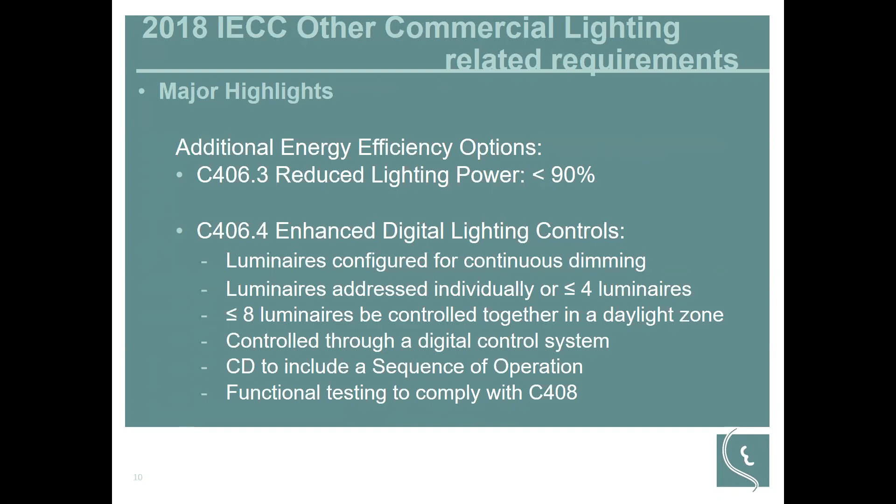So there are two lighting related additional efficiency packages that you can choose from. One is reduced lighting power: if you have less than 90% of what the building area method or space by space method allows, then you are meeting this additional efficiency package option. Or you could choose enhanced digital lighting control, which has requirements that are a little bit complicated, but achievable. So if you pick this as your additional energy efficiency option under the prescriptive path, here are the requirements that you need to meet.

And another highlight that we want to mention is the functional testing of lighting controls. Not only do you need lighting controls that have the ability to control the lighting fixtures, there is also language requiring you to make sure those are actually working properly.

So prior to the inspection, you need to make sure that fixtures and controls and all the hardware related to that properly function. So you need to do the testing.

And the second thing that we want to highlight is that there are requirements for documentation. Construction documents should include drawings that indicate the location and catalog number of each lighting control equipment. And manuals and reports should be provided to the owner within 90 days of the receipt of the certificate of occupancy.

And those manuals should include the names and addresses of a service agency for the controls, a narrative of how each system is intended to be operated, submittal data, the O&M manual, and a schedule for inspecting and recalibrating all the controls. So that information should be included in the manual.

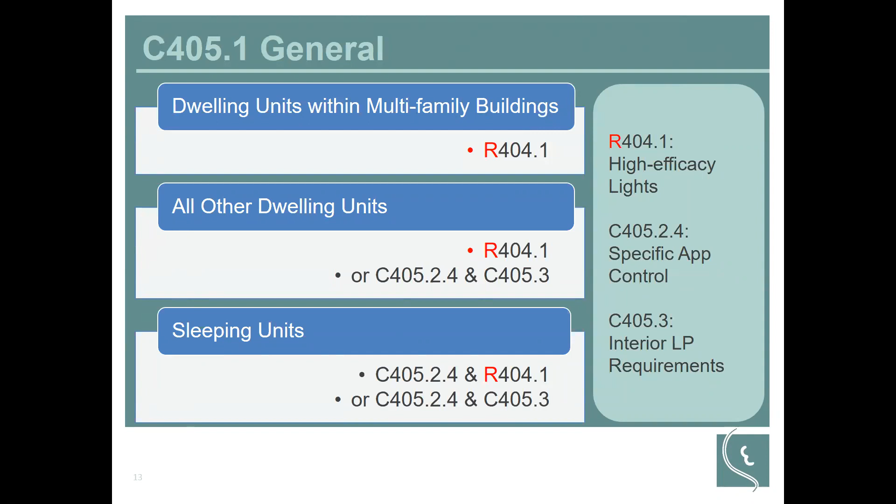Because we just mentioned that you could use the R section for some of the dwelling units, we will briefly mention the residential section of the lighting requirements. R404.1 is a mandatory section in the residential provisions. It says not less than 90% of permanent lighting should contain only high efficacy lamps. In 2015, it was 75%. Now it has increased to 90%.

And it says high efficacy lamp. According to the 2018 IECC, the definition of high efficacy lamps is as shown. It has different categories: if the lamps are more than 40 watts, this is the high efficacy standard. If the lamps are less than 15 watts, this is the high efficacy lamp standard.

But Illinois has its own amendments, and this section is amended. Well, it's not confirmed because the new code is not effective yet, but it will be changed to fixtures. So for high efficacy lighting, the fixture should be more than 55 lumens per watt, and the lamps should be more than 65 lumens per watt. That's the definition based on the Illinois amendments, which is different from the IECC's definition of high efficacy lamps. So you should be aware of this if your project is in Illinois.

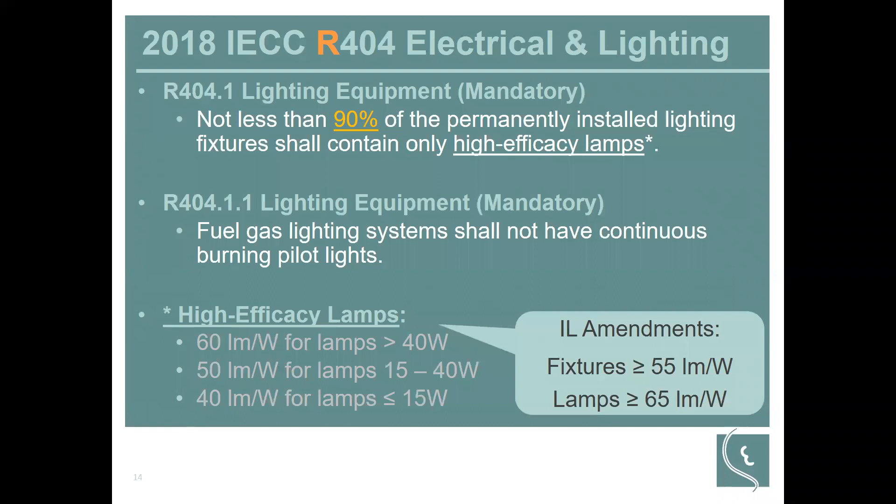So about lighting control. You can choose to comply with the traditional lighting control requirements, or now you can use LLLC, luminaire level lighting control. Luminaire level lighting control has three sections it needs to meet: occupancy control, specific application control, and manual control.

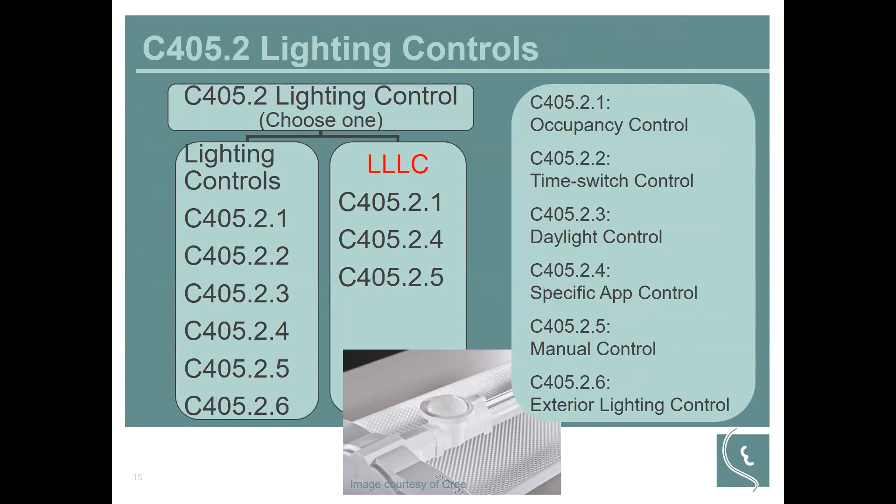On top of that, LLLC should be independently capable of these requirements. The first one is dimming control. The second one is daylighting control. And third, the luminaire level lighting control should be able to be configured and reconfigured for performance parameters, including the dimming set point, timeout, and wireless zoning capabilities.

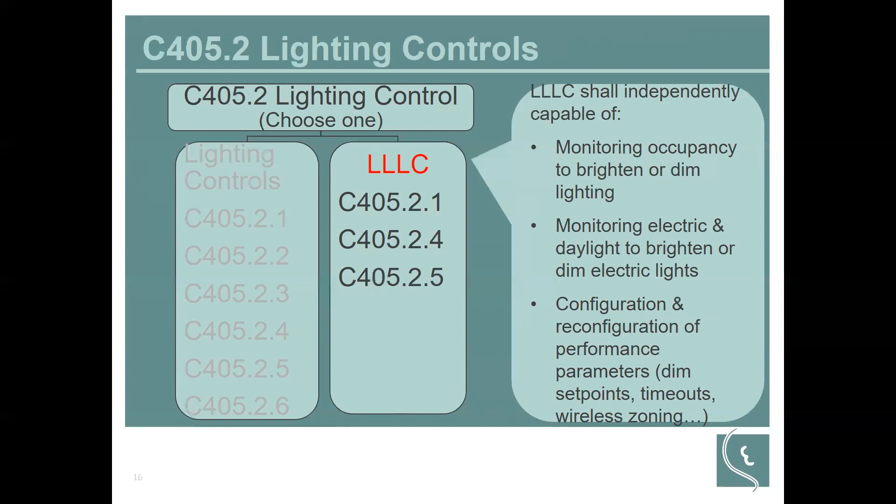And then occupant sensor control. The new thing in the 2018 IECC in terms of occupant sensor control is that open plan office areas are included in the occupant sensor control required areas. Other areas were already there in the 2015 IECC, with slight changes, like warehouse. In 2015, it said just warehouse. Now it says warehouse storage areas.

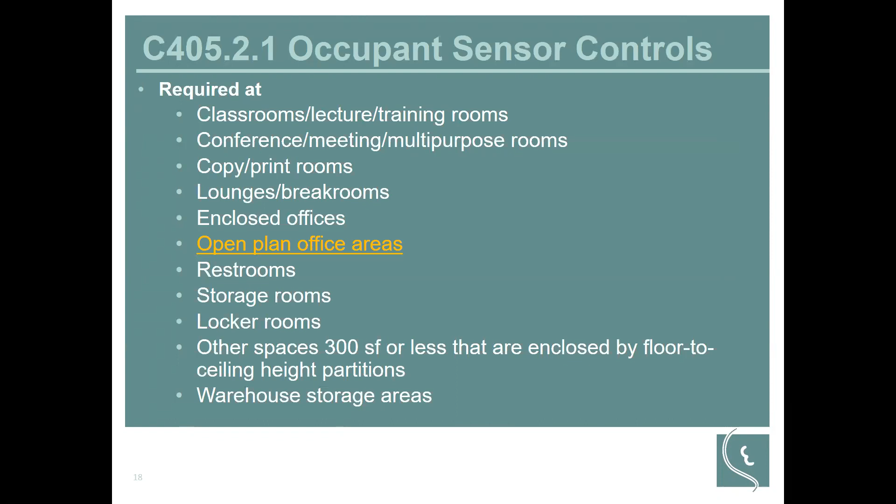And under the occupant sensor control, there are some requirements for what kind of function that occupant sensor control should have for different types of area. And one is warehouse.

So the requirements for the occupant sensor control in warehouse: it should reduce lighting power by at least 50% when there's no occupants there. So 50 or more. And then the control should cover the aisleways and open areas, but then it should be separately controlled. And then each aisle also needs to be independently controlled by the occupancy sensor.

So the picture here on the right shows that only one aisle is on. So it is separately controlled from other aisles or the general area.

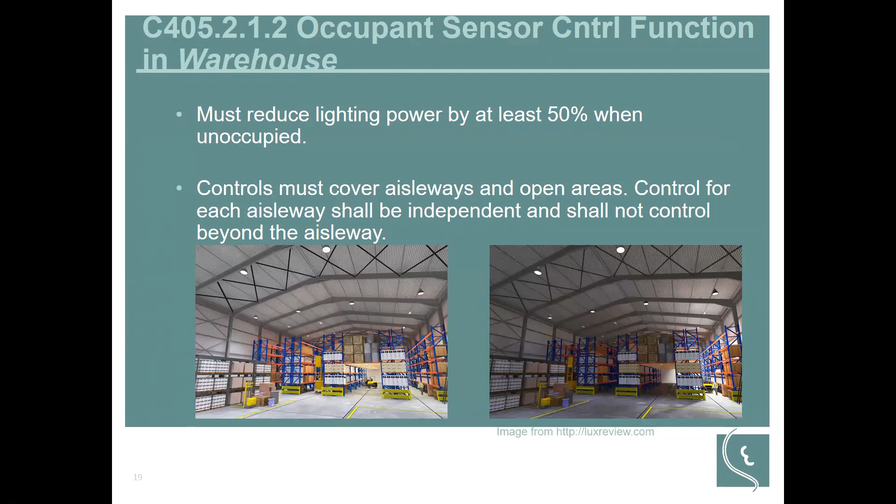And then the second area that has some detailed requirement for the occupant sensor control is open plan offices. So open plan offices that are larger than 300 square foot should have occupant sensor control. And you need to make sure that the control zone cannot be larger than 600 square foot.

So it will not make sense if you have a huge open plan office and have one occupant sensor control to control all the lights in there. So that's why it has the limitation on the control zone as 600 square foot.

And then the occupant sensor control in open plan offices should turn off general lights in all zones within 20 minutes, not 30 minutes. It was 30 in 2015. So it should be turned off within 20 minutes after occupants leave.

And then the control should reduce lighting power at least 80% within 20 minutes after no occupancy, meaning it could turn off, but you could have it dim down to 20%, reduced by 80%. And then daylight control should be activated only when occupants are present. So if there's nobody, the daylight control should not trigger the light to turn on.

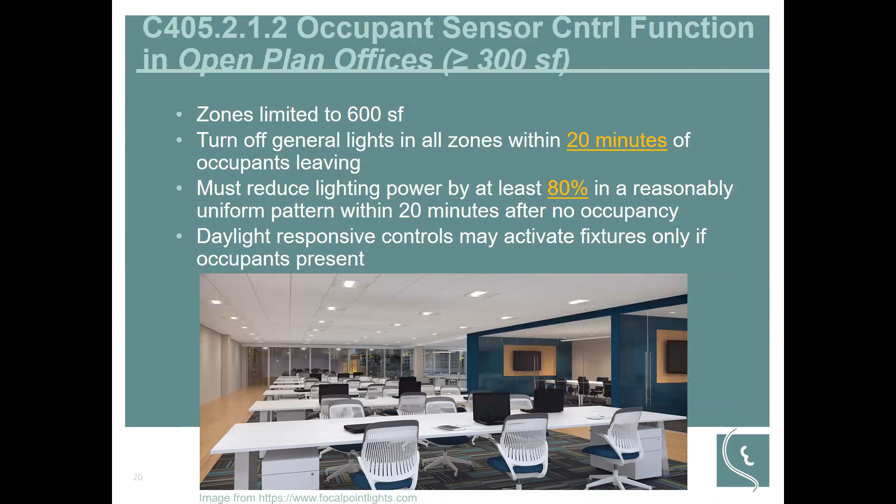And what about other areas other than warehouse and open plan offices? Those areas that are required to have occupant sensor control should have auto off within 20 minutes after occupants leave, and then it should have manual on, or it could be auto on if not more than 50% of power is being used. And there are some exceptions to this requirement, as you can see, mainly for safety reasons.

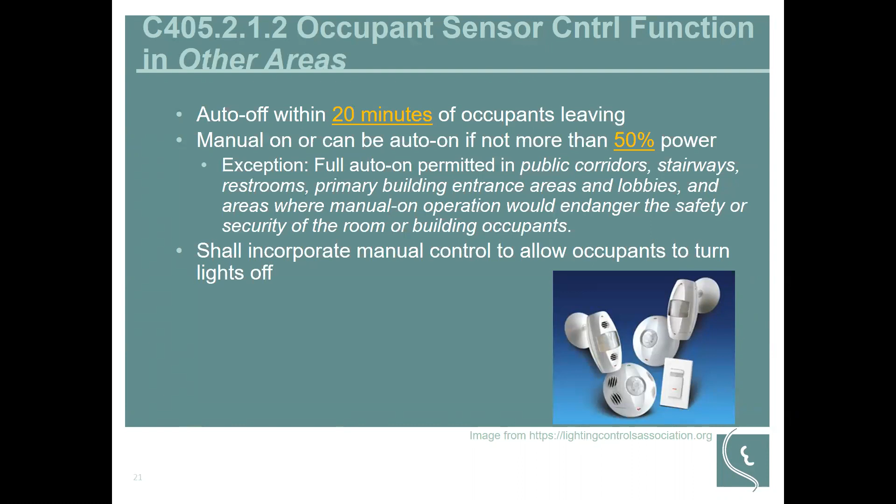And then another requirement for the occupant sensor control in other areas: it should incorporate a manual control. So if there's an occupant that needs to, for some reason, they should be able to turn off the automatically turned on lighting. So those are the requirements for the occupant sensor control in all other areas but warehouse and open space offices.

And then time switch controls. So time switch controls are required in all the areas that do not have occupancy sensor controls. So it either has occupancy sensor control or time switch controls. And the exceptions to this time switch control requirement, as you can see, are mainly for safety or patient care areas.

And then time switch control should have these functions. Each space should be provided with manual control for light reduction in accordance with this section. So it has a requirement for the manual control for light reduction, C405.2.2.2. So each space that has time control should have manual control for light reduction.

And time switch control should comply with these requirements, which are basically to have a 7-day daily schedule, a holiday shut-off function, and at least 10 hours of program backup if power is discontinued or disrupted.

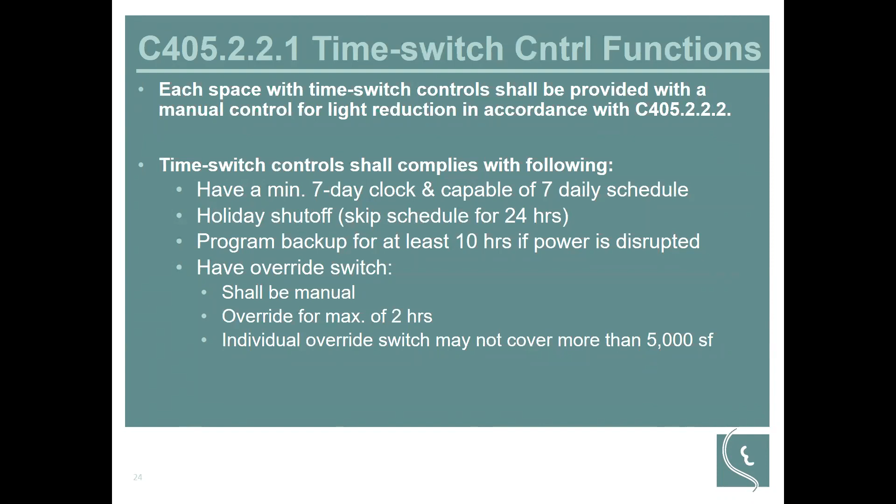So the light reduction control that we just talked about, the time switch control should have this too. So manual control should allow occupants to reduce lighting by at least 50% or more, reasonably and in a uniform pattern. So you can see the picture on the bottom. So you could reduce the light by dimming, so all the fixtures are equally dimmed to meet a certain level.

And then the second picture shows alternating luminaires. You could have every other fixture off, or the other half on. So it's kind of spotty on the ceiling, but it may work for certain applications. And then the last one is alternating lamp. If the fixture has multiple lamps, you can alternate.

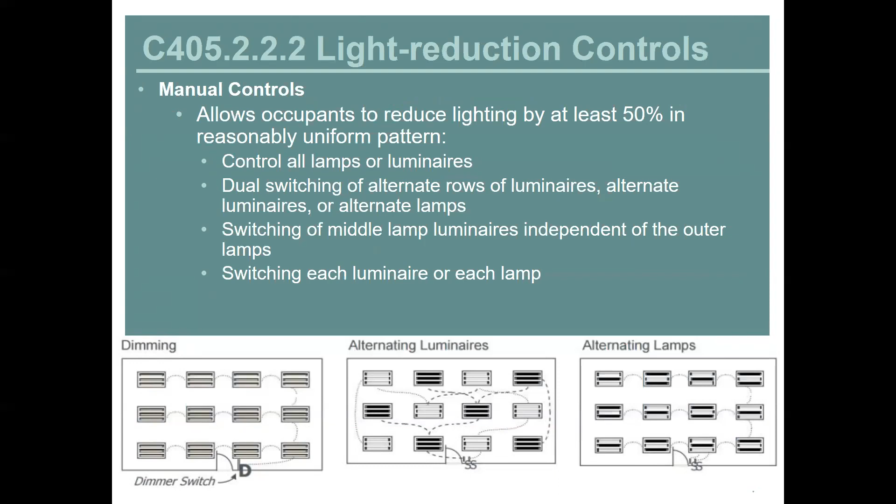So any of the ways, if you could reduce the total light by at least 50%, then you could meet this requirement of manual control. So now we're going to talk about daylight responsive control, and Ryan is going to take over from here.

Well, thank you, Sumi. So daylighting controls, these are required in spaces that do have either sidelit zones through windows or other fenestration, or toplit zones, which may include things such as skylights or clerestories. And so they do require this for spaces that have more than 150 watts of lighting power in these zones.

There are some exceptions here. One of these can be very useful for many projects. Obviously not a whole lot of facilities are healthcare facilities or specific application controls. The last exception is potentially a very useful one that we'll talk about a little bit later, as far as using reduced lighting power to no longer require daylight harvesting controls.

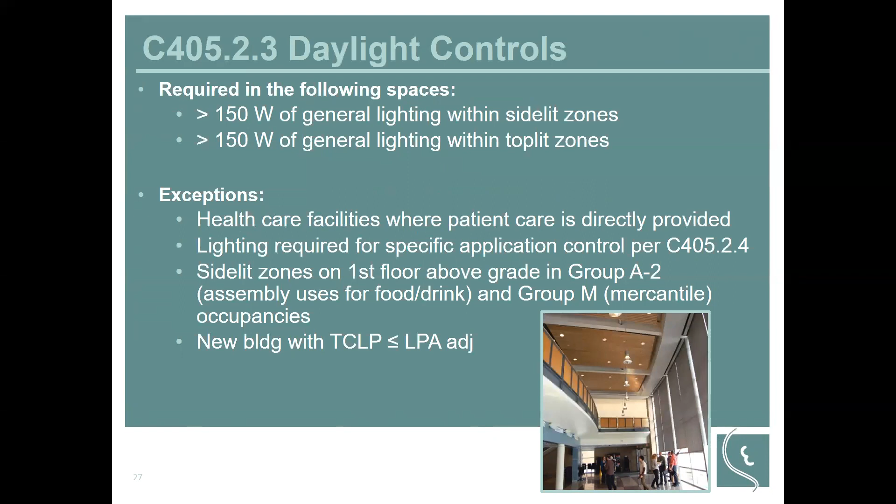As far as calculations, we won't go too deep into this, but you have to know what counts as a watt for your calculations as far as how much lighting power you have. It's the sum total of the luminaires, the ballasts, LED drivers, track lighting, as well as any other things that are not covered in the other sections.

Now, as mentioned about the lighting power for daylight harvesting, if you reduce your lighting power by at least 40% of the weighted area that is in the daylit zone, you don't have to have additional daylight harvesting controls, because by installing less power density, you are getting the savings through better lighting design rather than adding additional controls.

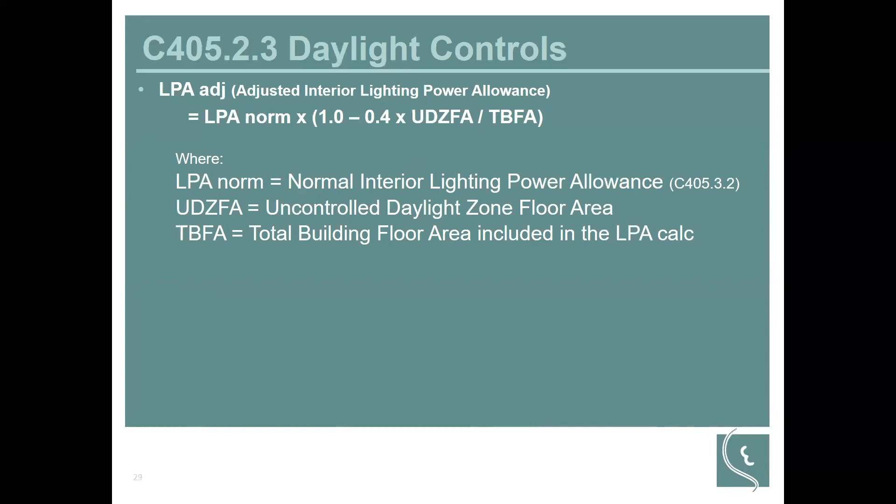So as far as what this might look like in our first example on the left, you can see that 50% of our total square footage is in the daylit zones. So 100,000 divided by 200,000 gives us our 50%. And so being 40% of the weighted area of the 50%, that means if I reduce my lighting power by 20% or more of the budget, then I don't have to do daylight harvesting controls.

In the second example, here we have a smaller daylit zone where it's only 50,000 square feet of a 200,000 square foot building. So it's a quarter of the space. So if I take 40% less and I need a quarter of that, if I can reduce my lighting power by 10% across the whole building, I now take advantage of that exception. This is one very beneficial thing, because if you make use of this, that's daylight harvesting controls that you don't have to buy, you don't have to install, and you don't have to commission.

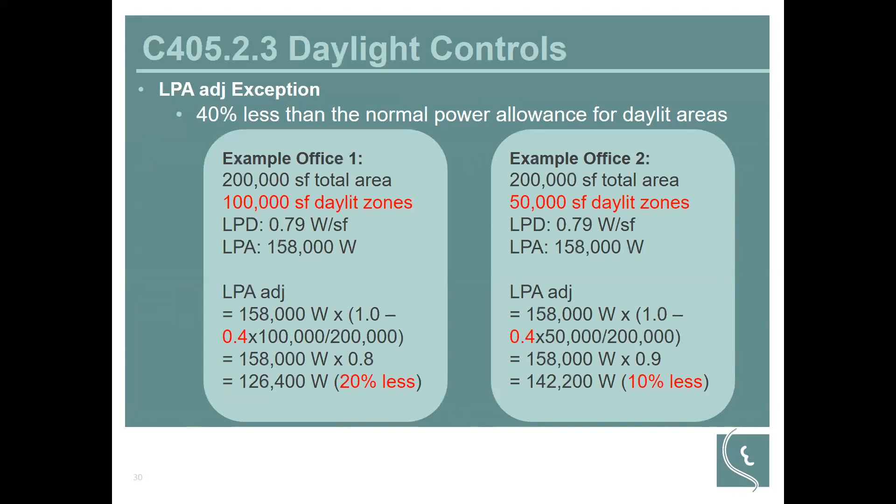Daylight harvesting does have to be able to completely turn off lights in the event there is adequate daylight. Many people have likely experienced being in a very bright room, and you still have the lights on, even though they're not very contributive to the overall lighting environment.

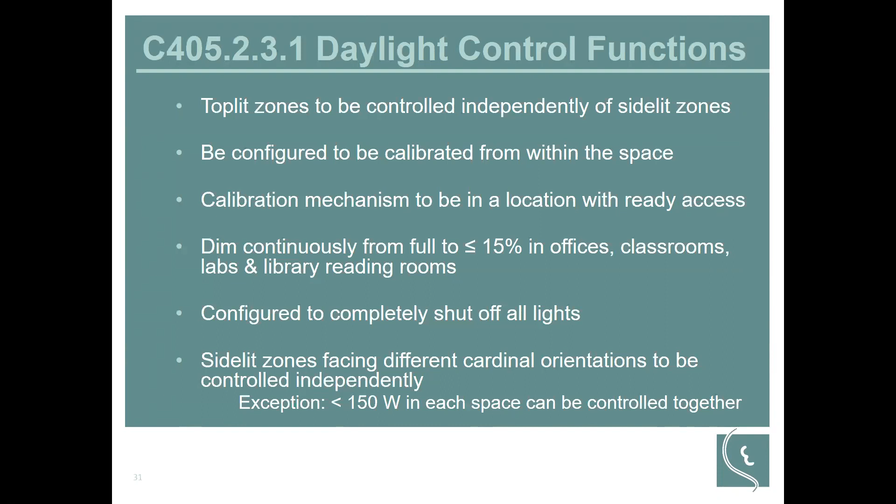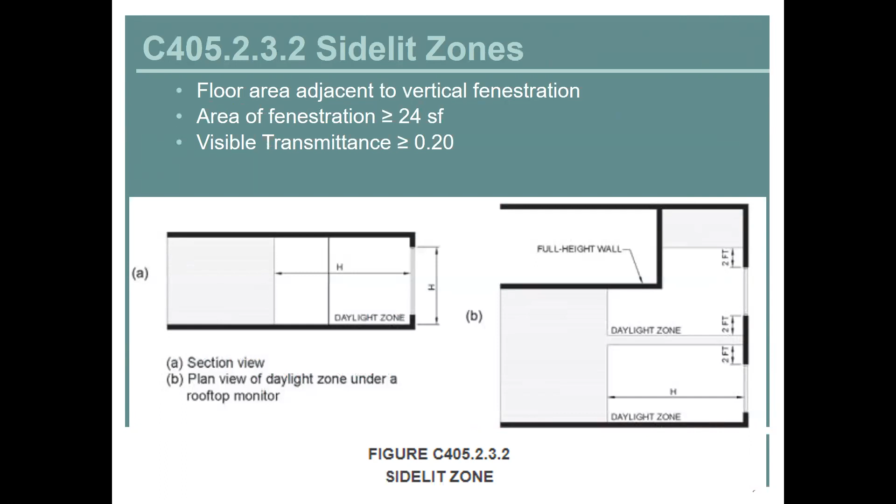One thing that the code does very well is they provided some very nice depictions as far as how to calculate the zone areas, noting that for sidelit zones, you have to have windows that are large enough to qualify as sidelit areas. Windows that are less than 24 square feet or have extreme tinting on them would not qualify as a sidelit area. And these depictions are also in the online version of the code. So again, we would refer you back to that for further clarification and assistance with trying to draw out where those areas are.

This is what it might look like on a set of blueprints. This is at a school. Now here you can see that the shaded areas are my sidelit zones. I don't have any skylights in this building, so I don't have any toplit zones. But it is not uncommon for designers to have a set of sheets that indicate the sidelit zones on a lighting print and a separate print without the shading for clarity of viewing.

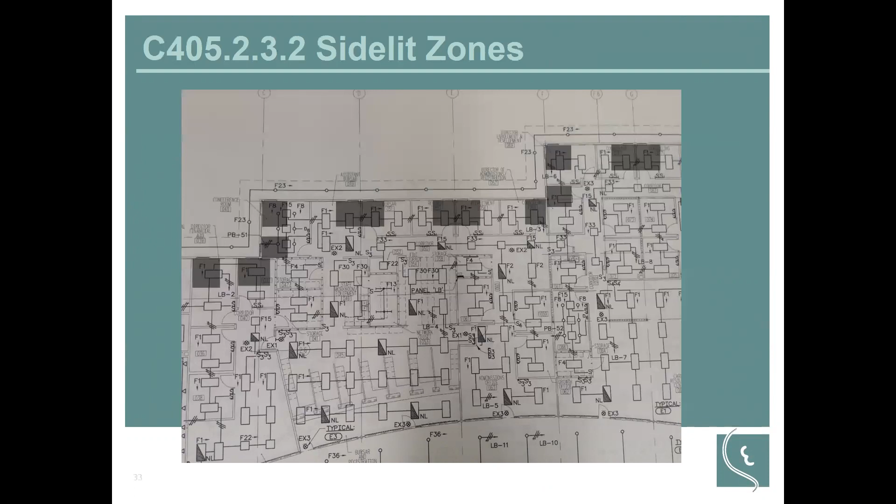And this is something that is required, that you identify the side-lit and top-lit zones on the drawings. As far as top-lit zones, and again, the code goes into a couple of different methodologies. Here showing a skylight. They do have other ones for roof monitors and other top-lit type of zones. And here they do provide some provisions for if you have buildings that have blocked direct sunlight during these peak times, that you don't have to have the top-lit zone controls, purely because it wouldn't be of any benefit since the buildings may be in the shade through a substantial portion of the year.

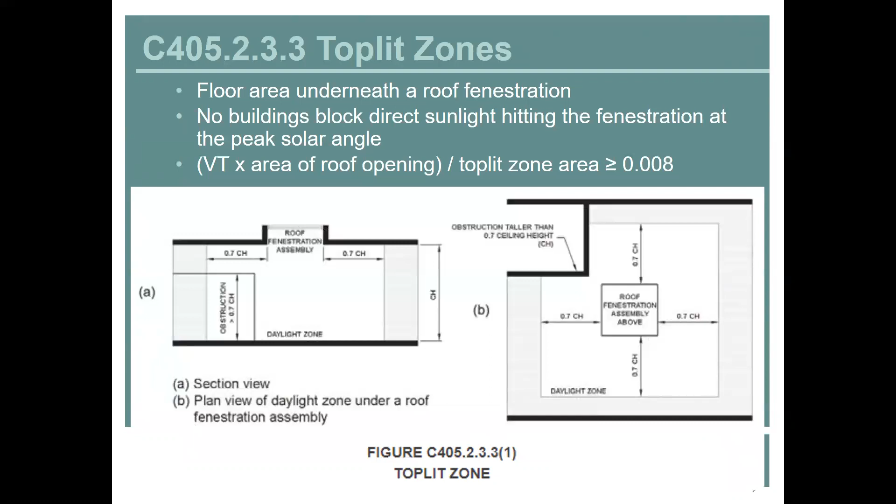As Sumi had talked earlier, there are some specific application controls that are required for lighting controls. One of these is for display and accent lighting, obviously in your display cases, supplemental task lighting, so your desk lights, and lighting equipment for sales or demonstration. So they do have provisions to not require controls for occupant sensor or time switch, but they may also require specific manual controls separate from the general area lighting.

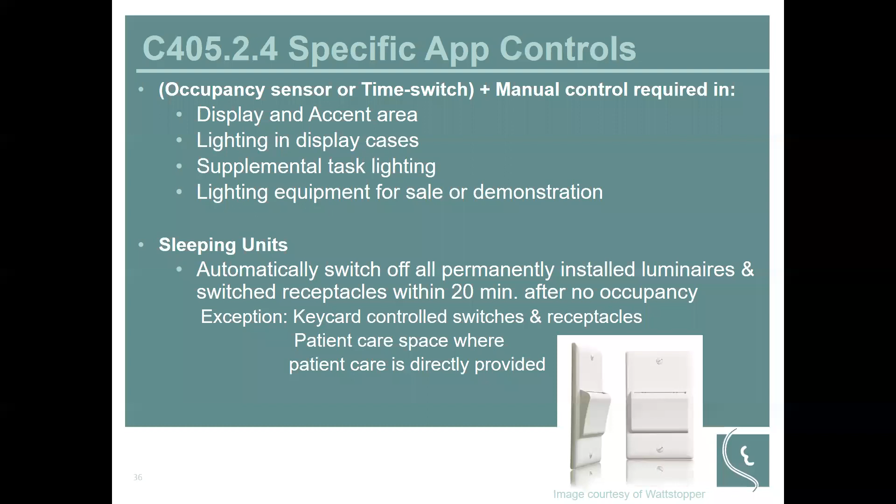Sleeping units, we're now seeing these in more and more locations, hotels and motels using key card for sleeping units in lieu of occupant sensing controls that are required to turn it off 20 minutes after there is no longer an occupant sensed in the space. Beyond the keycard controlled switches and receptacles, they also do have an exception, again, where patient care is directly provided. For dwelling units, they do have specific requirements for occupant sensor controls. Again, these are dwelling units inside of commercial buildings.

And also there are provisions for non-visual applications. Here depicted plants and food warming. So this would use time switch controls that are independent of the general lighting. You know, one might imagine a restaurant, if these heating lamps were controlled by the general lighting circuits, then these warming lamps would be on from before the restaurant's open till after it's closed, even though there's not likely to be any food present during these times.

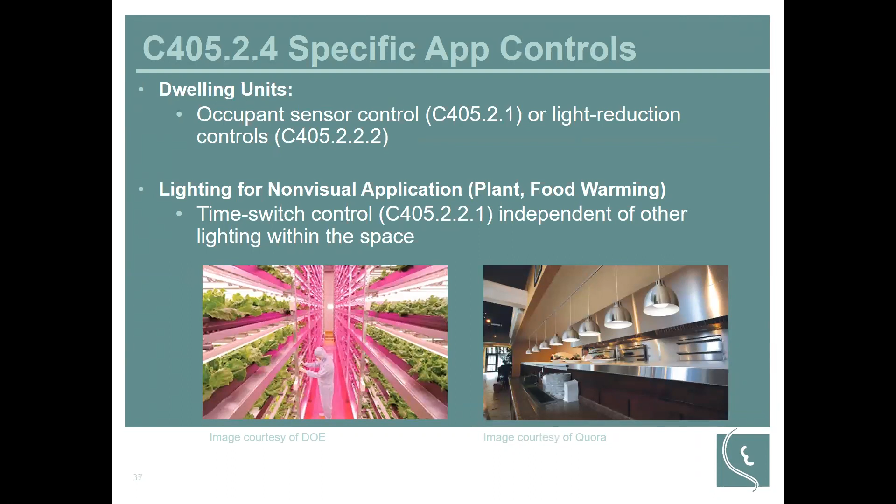As far as exterior lighting controls, there have been substantial changes in this area as far as decorative lighting, which includes facade and landscape lighting, to require not only daylight shutoff, but also time switch function. Previously, a lot of the exterior lighting controls required either daylight shutoff or time switch function. New codes are now requiring it to have both functions. Decorative lighting also has requirements for shutoff during non-business hours, and exterior lighting is required to have lighting setback of at least 30% during these non-business hours. And it does provide some guidance as far as a couple of different options for determining what that time frame is.

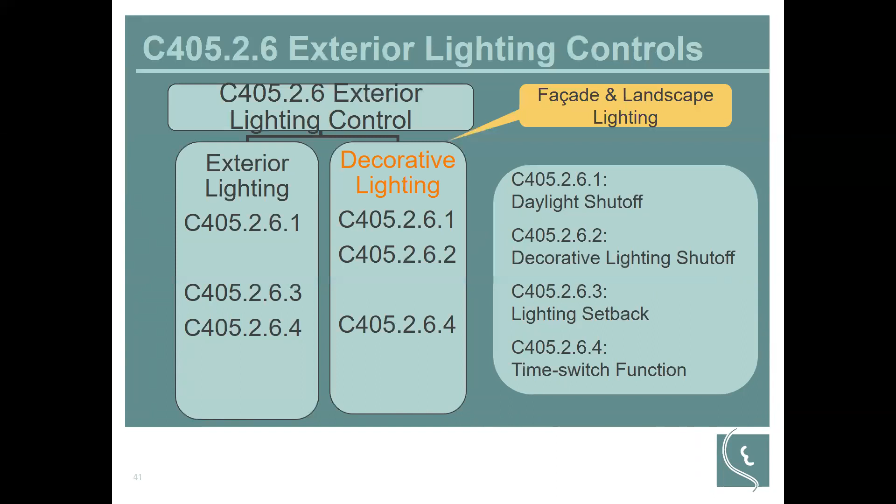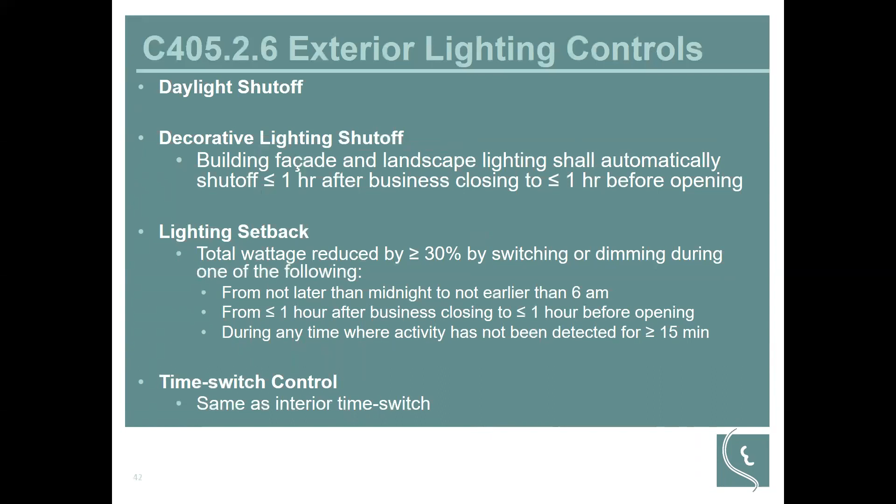Noting the daylight shutoff, this is the one that's the most common. Decorative lighting shutoff, here noting that's within 1 hour of business. And the lighting setback, here's the three options. It can either be turned off from midnight to not earlier than 6 a.m., or within 1 hour of business, or you can use an occupant sensor and turn the lights off when there is no activity for greater than 15 minutes. So, time switch control provisions here are the same as interiors, which includes 7 different daily schedules, holiday setbacks, and program backup capability of at least 10 hours.

As we move over to interior lighting, you can choose either the building area method or space by space method. This does have some additional allowances for special use lighting, particularly sales areas. And this fits very nicely with the National Electrical Code, which allows for a reduced load calculation if you do provide some power monitoring of these lighting loads, given your building is within an energy code jurisdiction, which any building in the state of Illinois would be under this for commercial and residential permitted buildings.

The building area method covers broad categories. This is the more simple type to use. It's a gross square footage times the allowable watts per square foot to give you your budget.

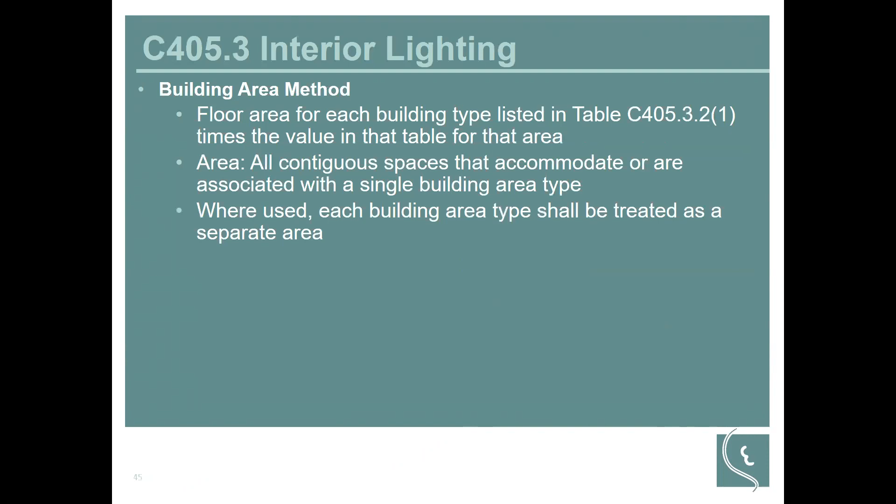So you can split building type areas. So you may have a dormitory with an attached performing arts center. That could be a possibility for a college campus. And so you can segregate these large categories of square footage.

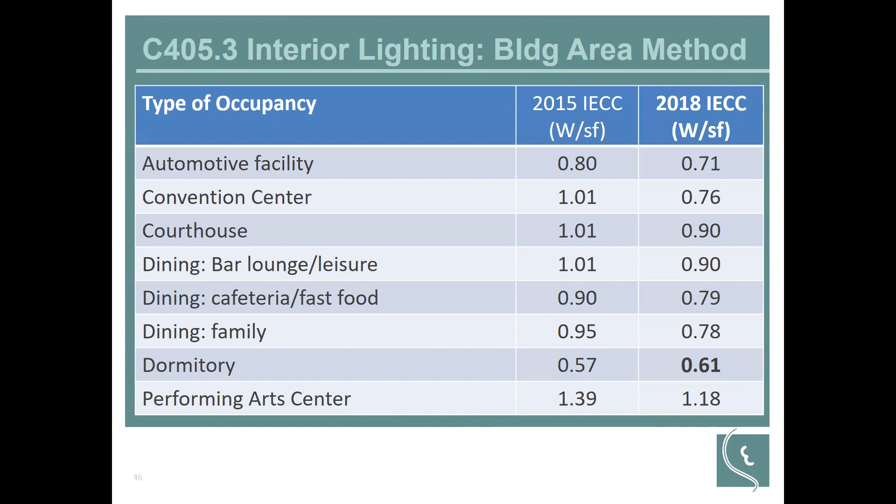Now the NEC does account for some plug load in their 3 watts per square foot, but as you can imagine, that's still rather substantial with having over 2 watts per square foot of plug load available and accounted for in the NEC. As noted earlier, if you do have some monitoring of the lighting, you can actually do a reduced load calculation for the National Electric Code to prevent some of the equipment oversizing that may otherwise occur.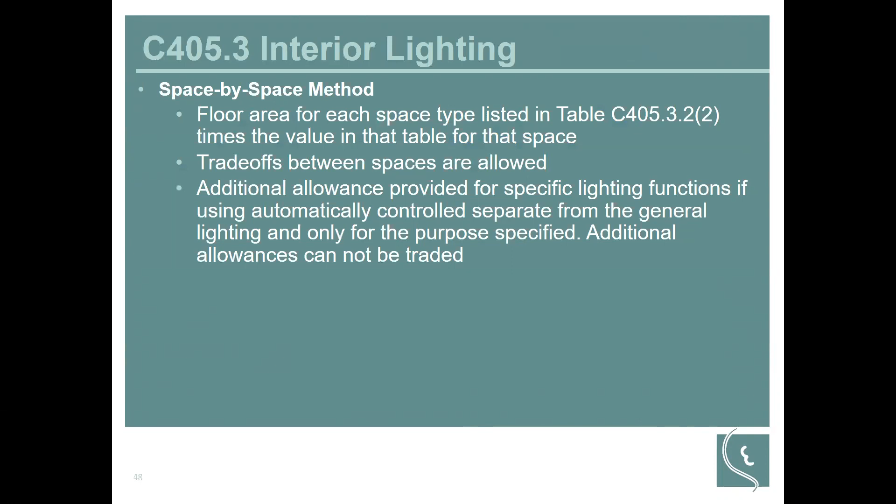If you do find yourself needing an alternative to the building area method, you can use a space by space, and these are much more specific and can be traded between the spaces except for some of the additional lighting allowances, specifically sales areas cannot be traded to the general area.

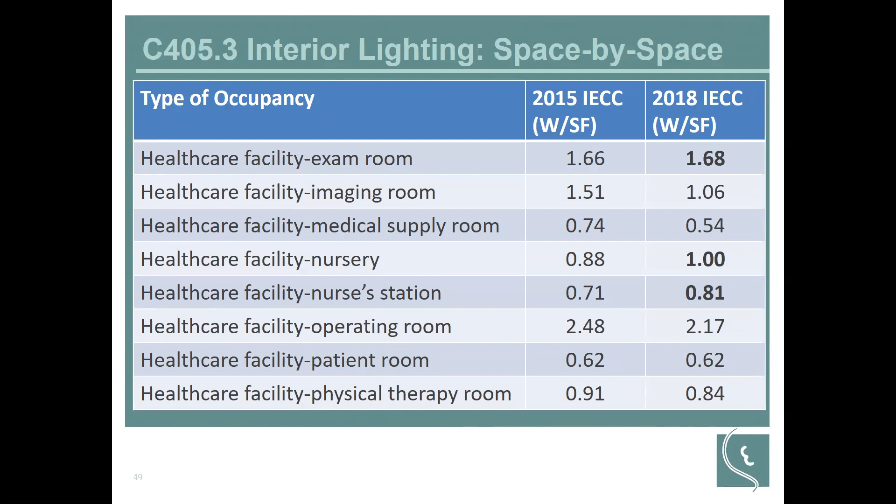So this kind of gives you a snapshot of what some of this is. A healthcare clinic would be, through the building area method, 0.82 watts per square foot, and a hospital would have a budget of 1.05 watts per square foot. So as you can see, you might be able to get some benefit by using the space by space method as compared to the building area method. However, your calculation becomes much more complicated, as rather than a healthcare facility just having a single calculation, here there's at least 8 different spaces that would have to be allowed for.

Noted earlier about determining the connected load. One of the big changes in the IECC with the 2018 version has been in the track lighting. The base allowance for track lighting is now down to 8 watts per linear foot, whereas previously it was 30 watts per linear foot as a base allowance. Now, if you do have more than 8 watts per linear foot of connected load on that track, then you do have to use the actual connected wattage, and not just the 8 watts per linear foot.

I compare the IECC's 8 watts per foot to ASHRAE 90.1, which uses 30 watts per foot, and the National Electric Code that is 75 watts per foot. So that's a rather dramatic difference between these three.

As we move over to exterior lighting, they break it into 4 zones. Zones 1 and 4 will be used very infrequently. Most areas will be zones 2 or 3. Zone 4 would only be found within the city of Chicago, in the state of Illinois, and would have to be designated by the local land use authority as being in the high activity commercial zone. So most everything you're going to find is in zones 2 and 3.

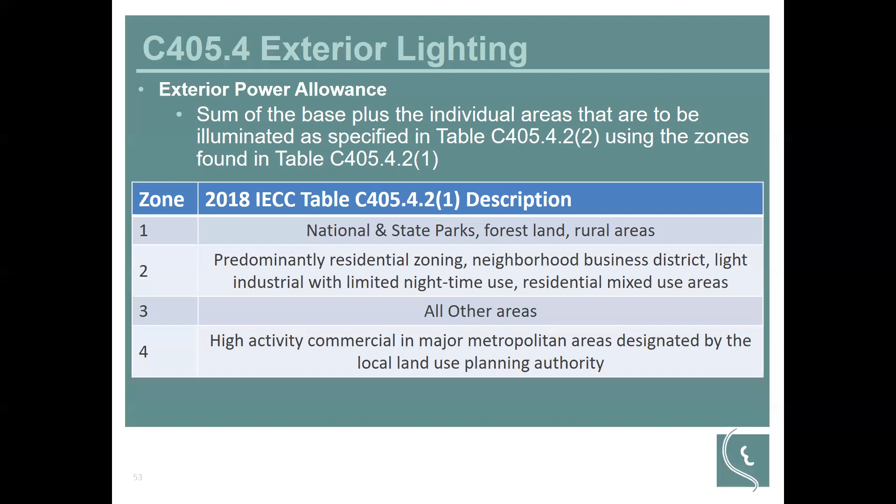Not surprisingly, as you move into more and more dense population, the allowances increase, with zone 4 being the least restrictive and zone 1 being the most restrictive. Again, zone 1 being your national and state parks type of facilities.

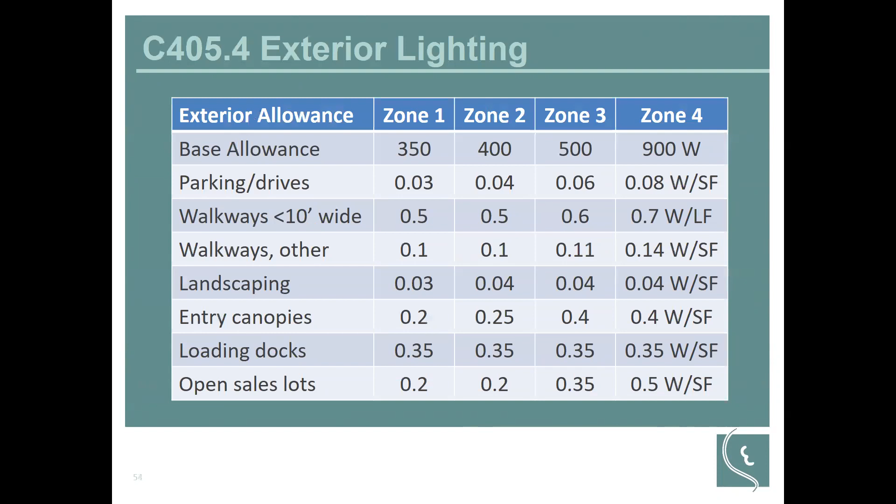I will note that on the table in this section, there is an errata where after the first printing of the 2018 code book, there were some typos made to the table C405.4.2(2). So check those errata for the updated wattage for that table.

This is some additional exterior lighting. This is not tradable with the other exterior lighting. So your building facades, ATMs, inspections, and the like.

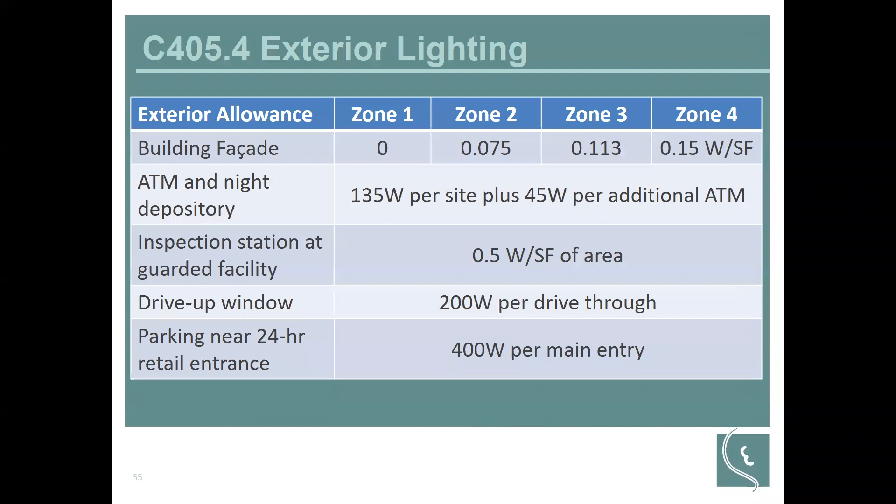So here, looking at a drive-up ATM and bank drive-up windows. So this example here, I've got one ATM, so I'd get 135 watts for that lane plus 200 watts per drive-through. So for this example, I've got 135 plus 2 times 200 for a total allowance at this canopy of 535 watts of connected load I could have here.

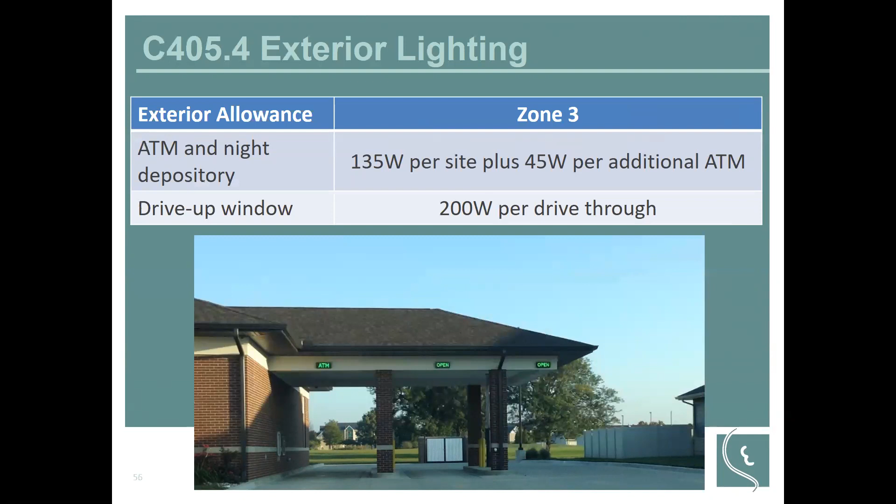Now, if these were all 3 ATMs, then it would be 135 plus 45 times 2, or a total of 225 watts of connected load. Now, we are focused predominantly on the IECC because that is what we find most people use. ASHRAE 90.1 has a couple of unique situations, which is why we see more people lean away from it. And the two predominant things are automatic receptacle controls and electrical energy monitoring. Normally, ASHRAE 90.1 is used only if a client requests it, or for semi-heated spaces.

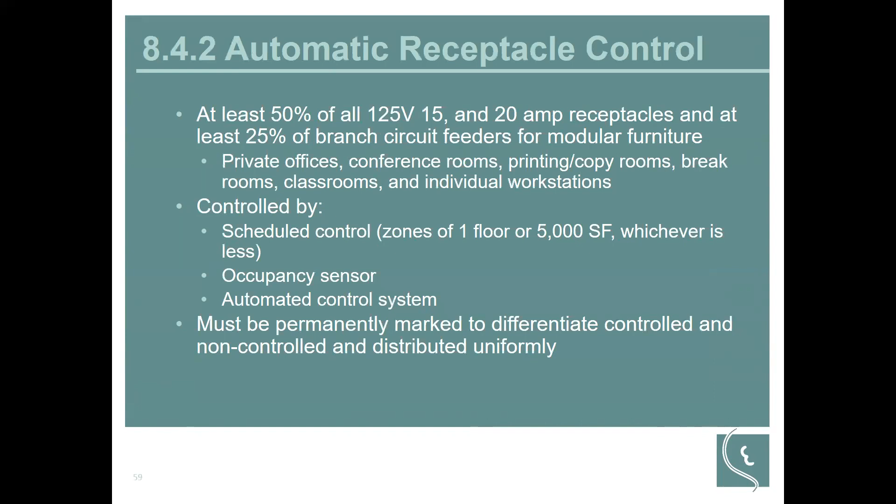Now, the state of Illinois previously was required to use ASHRAE 90.1. With this update cycle, they're going to be gaining flexibility to use either IECC or ASHRAE 90.1. The automatic receptacle control requires at least 50% of the 15 and 20 amp receptacles be controlled, and they must be marked permanently to differentiate controlled and non-controlled, and you have to distribute them uniformly across the space.

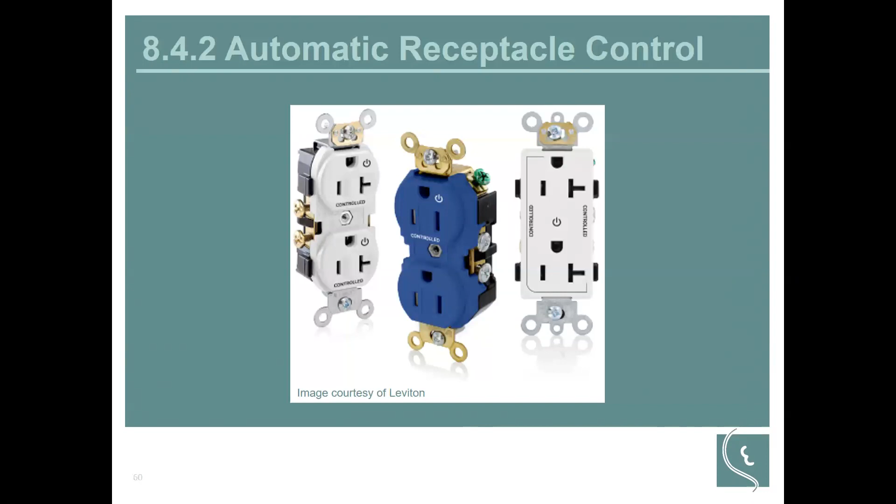So this is a depiction of how some of those receptacles might look. The white receptacles on the left and right, both receptacles are controlled. And in the blue receptacle in the middle, the upper receptacle is controlled and the lower receptacle is not. So in the case of those white receptacles, there might be a second receptacle beside it that is not controlled to provide your 50%, or you might use one like the blue one to get your 50% where every other plug is controlled.

Electrical energy monitoring, this is the other piece that's found in 90.1 but not in the IECC. This provision may seem onerous by having to segregate your loads. However, for troubleshooting, it would be very beneficial to have your loads segregated to see, you know, are my exterior lighting controls working or not?

Do I have interior lighting that's being left on overnight? Do I have some problems in my heating and cooling equipment? Do I have a heat pump that's not working and causing electric resistance heat to be used when it shouldn't be? So this could be a provision that may be useful to a building owner, even if not required by the IECC.